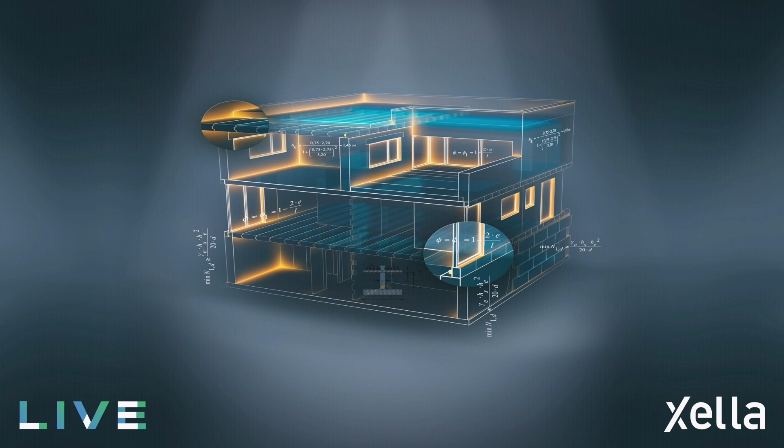We make structural design, a very precise way. We're using finite elements, so the digital twin is used here to make a clear structural design, to have all the information of the building, to give the building materials the right performance. The same we are doing from the energetic side. Thermal bridges are calculated in a way you can do it in a perfect way, so there is no waste of energy in the theory.

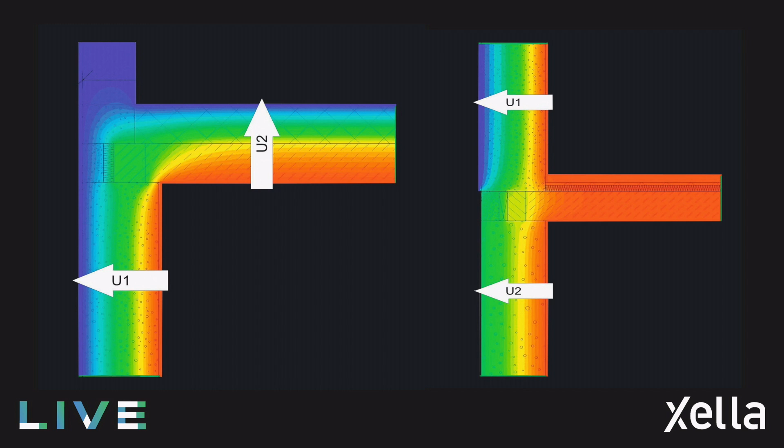So you see it here. The red is a warm side, the blue is a cold side, so we can bring everything in line. And that's a good thing. We have the computer, we have the information in the digital model. So we can take it out, bring it to different software solutions, and calculate the whole building.

Then the offline world starts, so the construction. You have very experienced craftsmen on the site. They know to use the materials. The increase of prefabrication, like Stefan told here, it's a normal way, because the lack of craftsmen, it's really a problem in the industry today. If you are looking for masonry workers, you will not find them in this number we need. So we start with prefabrication, larger elements, up to the size of a wall.

But we also invent the process of building. We start here in the Netherlands with the first site with the HoloLens. So you don't have drawings on the site, you use the HoloLens, and you see the wall you need to erect. So the funny thing, on the fair in Cologne just 2 weeks ago, we have had the HoloLens by Trimble here, the first HoloLens 2, and the German colleagues, they don't have it because we ordered it in Poland, so it was a little bit faster there. So digitalization is a global thing.

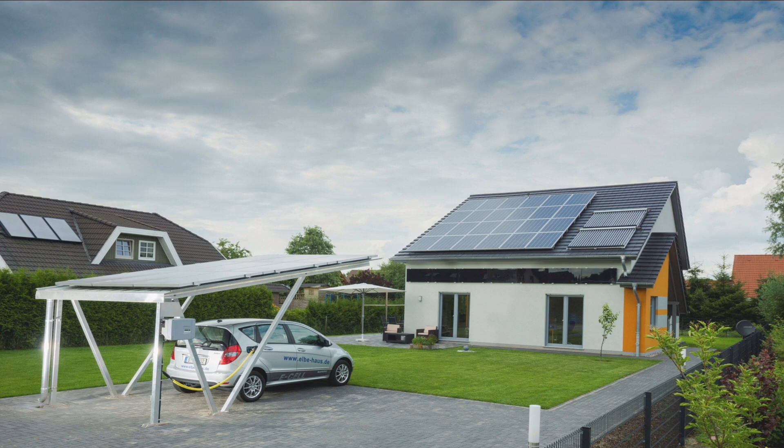And at the end, we have everything in there. We have built a nice house. We have a building pass, an energy pass, so we can hand it over. But don't do it in paper format. The file of a building is today the digital twin. There you have all the information in. And if you use this tool, it's very good. You have the material information in there, the maintenance information, so you can hand over a building to a customer with all information about maintenance.

So here also solar power. This is one of the first buildings in Germany, a zero-emission building with electric car, with solar power, with heat water. So if you see today a house or a building, a single family house, it's 70% of technology in it and only 30% of traditional engineering in it.

So you must do it in the right way there, and you must hand over to the owner a digital twin so that he understands what he can do with the building, how he can live in it, and there's the truth and the myth you can decide about. You can't open a window in a zero-emission building, but it looks very similar to a standard building. It's just technology you bring in it.

But nowadays, it's not only building a house. You must look much more closely at the resources you are using there. From the beginning, you saw we have only a few resources we are needing. But you must find them. And we don't have these resources unlimited. So it's a job of all building producers and manufacturers to take care to have a source of resources and use it in the best way.

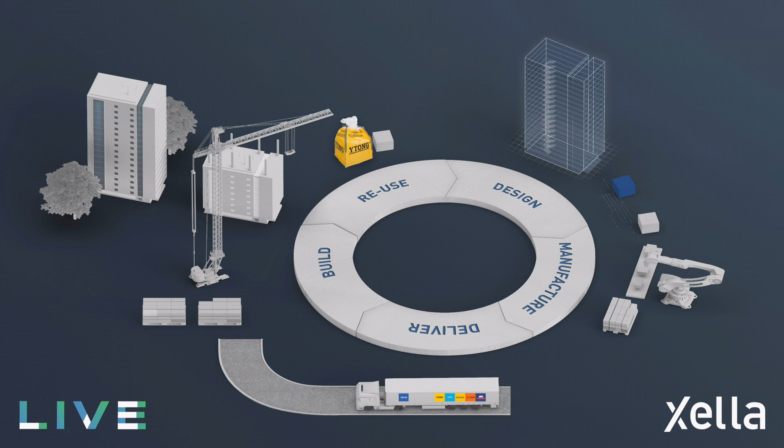So circular economy is one of the buzzwords here. You design the materials, and at the end of the life cycle, here at the top, you reuse the materials. If you don't do the urban mining, in the future we will have a lack of resources for new products. So we are thinking now how we can use the material in 40 to 50 years.

There's an obligation in the European Union to use recycling materials. In some countries, it's a must-have. In other countries, you can say, okay, you get better points in LEED or in all these certification systems. But you must do it. So you will do it like an X-ray now. You go much deeper in the building to understand the material content, to understand everything in there. But this is nothing new. You can have it in paper format.

I'm talking now a little bit about lifecycle analysis. The environmental product declaration gives you, in paper format, for almost 10, 12 years, the information on all your material content in view of environmental protection. You can get it from a manufacturer, you can get it from associations, but they are all similar. They have a clear structure, a clear content from production to the reuse phase. So it's the whole life cycle of a material.

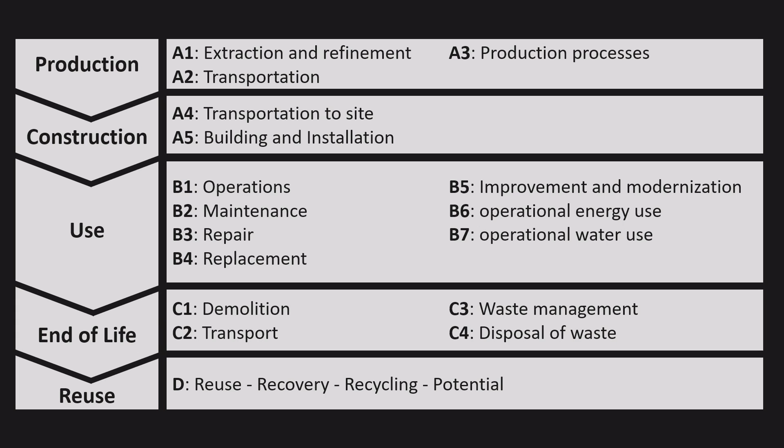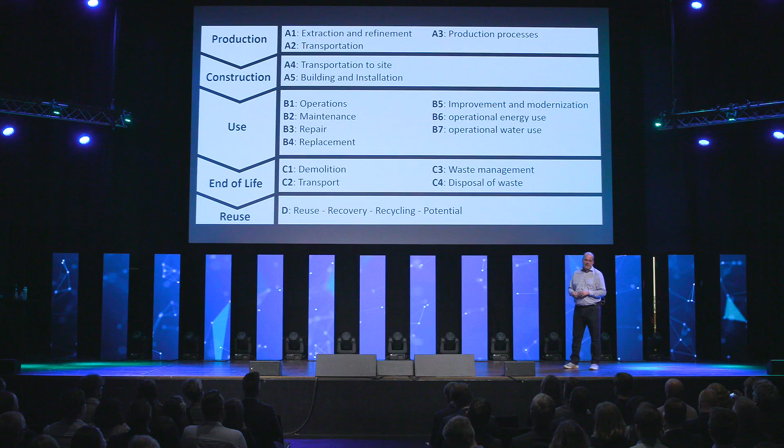And you must do it now for your materials. It will be one part of the Green Deal of the European Commission that you must have an environmental product declaration of your material. It doesn't matter what kind of material you are producing, but you will have to declare all the steps there from A to D in the different levels.

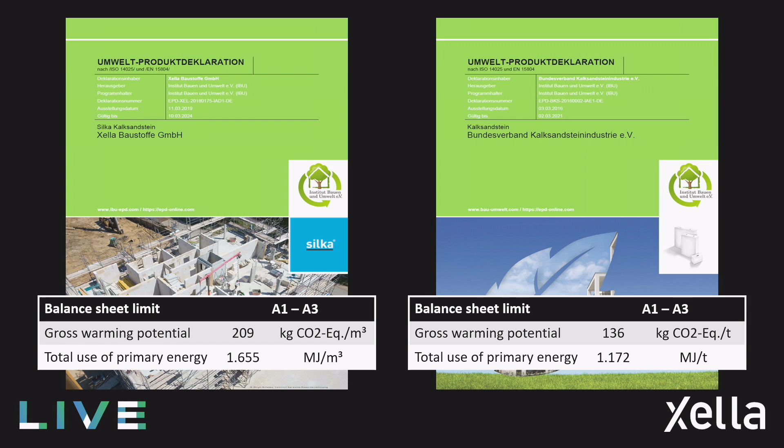But be aware, here you can see on the left side the Xella version for our calcium silicate products, and on the right side from the association in Germany for the same product. At first view you say, okay, well, not so good the product. But if you do it just this way and don't read it carefully, then you compare apples with pears. Because the problem is, and this is a big advantage of digitalization, that the units are different in the paper formats. On the left-hand side, it's based on cubic meter of material. On the right-hand side, it's on ton of material. So you're free how to declare.

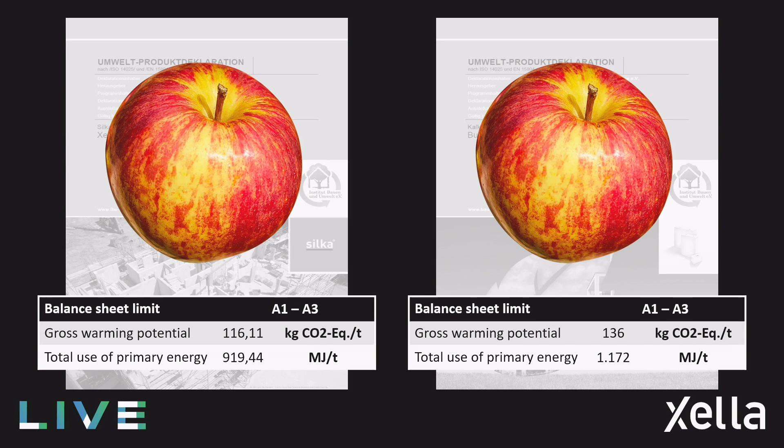But in the future, it will be at a similar level, and if you recalculate it, then you compare apples with apples, and you see it's the same value. It's a better value here for the material because we spend a lot of money and a lot of time monitoring our energy consumption. We are reusing material, so we have closed production loops in our factories. There is no waste in the AAC production, which originally comes from Sweden. 80 years ago, they invented it because of the wood crisis in Sweden. Nobody can imagine a crisis of wood, but okay, it's the way.

And now we have the chance to put all the information in the digital twin of our blocks. So we have the data in the companies. You have the data in your companies about your material properties. You need to add the environmental properties, and then you can bring it to your digital twins of the material.

A little bit of advertisement for BIMobject. They have offered it for half a year. You can find it there in the properties, where you can put in your environmental product data in the right units. So you have there all the same information I showed you on paper, now here in digital format.

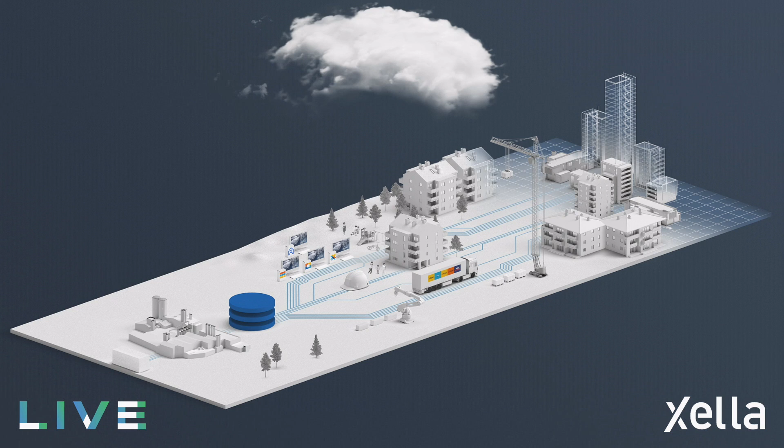And we decided to make the environmental impact of all our material visible. We have here our digital system on the left-hand side. It's the Xella group, and then we spread the data here from the blue data hub. And we will add, step by step, all information about all material properties for the performance of the materials on the one hand side and then environmental impact on the other hand side, so that designers can use it and bring it into their ideas.

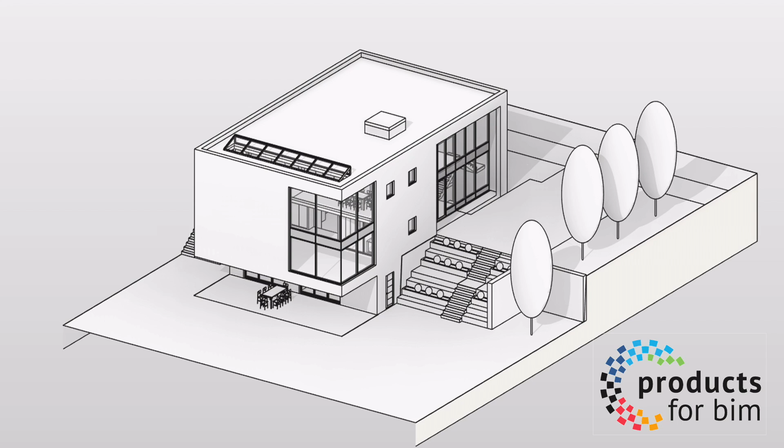This is an example. We have the German Association Products for BIM, where we designed a sample building. It's only half of the part. There's an industrial building on the other side. And this is a typical Ytong wall. We have only white building materials. So this is how it should look if you go into a new construction.

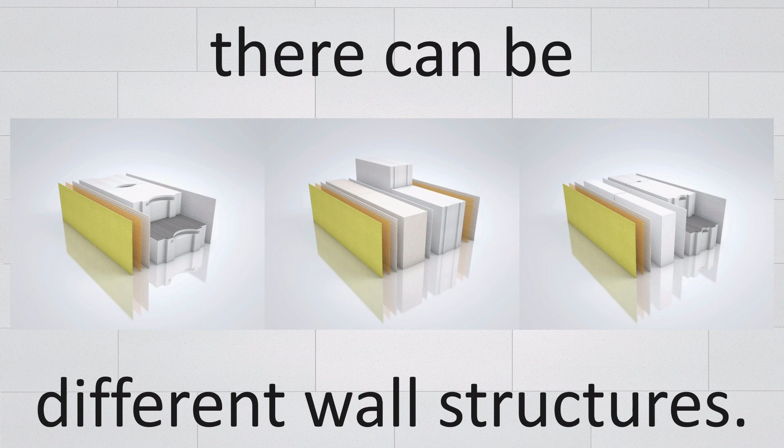But behind this wall, there can be many technically similar wall solutions. I selected only 3 different wall solutions. They have the same technical performance: thermal resistance, load capacity, and almost the same wall thickness. We are not talking about more than 2 or 3 centimeters difference in thickness. And if you bring this to the different models, you can do it very easily. That's a good thing about digitalization. You change the wall from one type to another type.

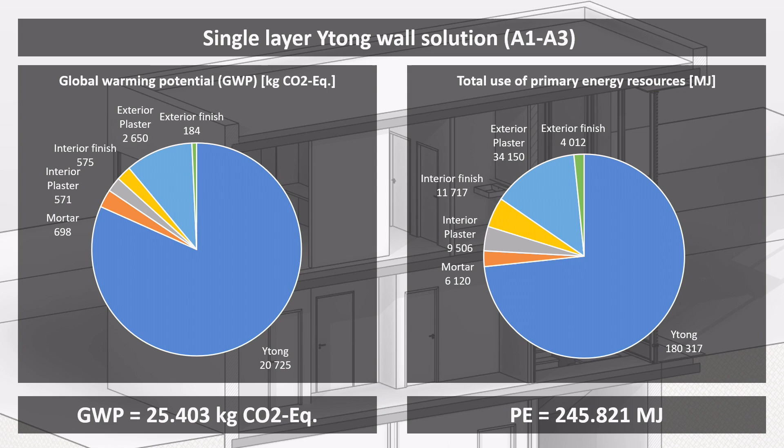So we start here with a monolithic Ytong wall, 80 years experience with it. It's one of the best solutions. And this is a lifecycle analysis for the production of this material. And you see there is a lot of energy in it. We can do the same with a calcium silicate wall with a mineral insulation system, our Multipor system. So we reduce a little bit the global warming potential and the primary energy use.

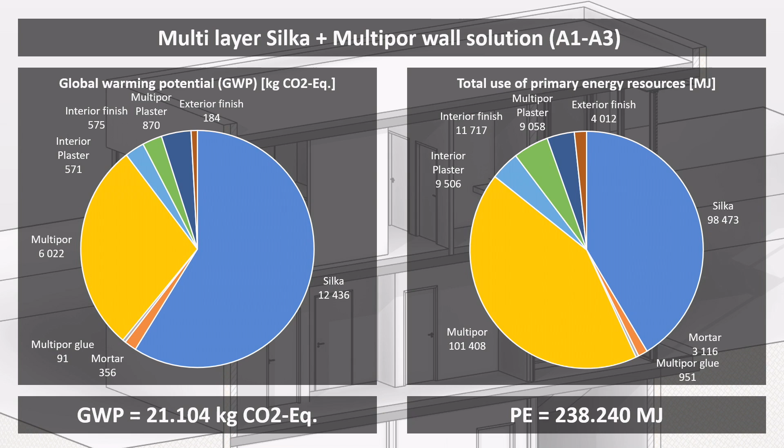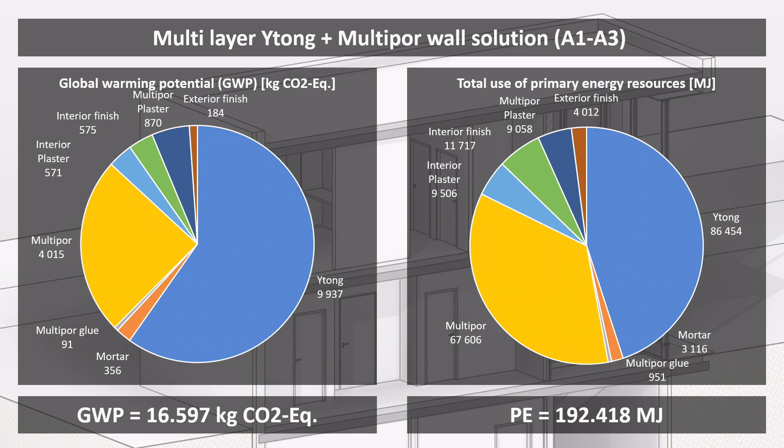The same, we can combine Ytong with Multipor. It's also working for this building. Now you have less than 200,000 megajoules of primary energy. And this is how we can do it: you make the design of a building step by step at the beginning, and you can see that by the design you can save about 35% of global warming potential. And this is the role of designers in the future, to make decisions based on energy properties and environmental properties.

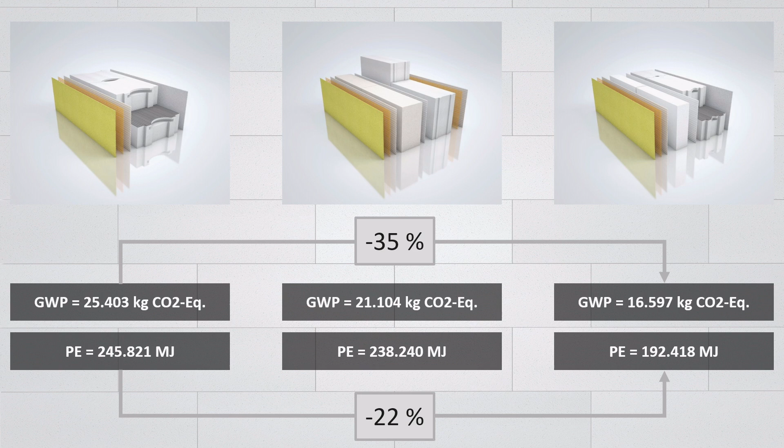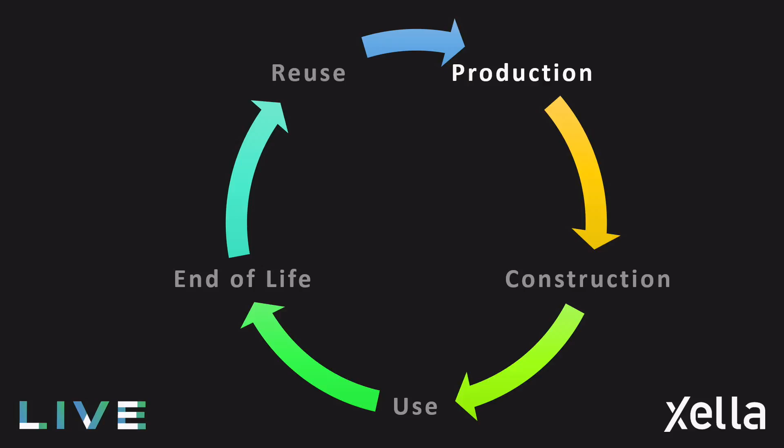But this is only one part. I show you here only the production side. Materials have a life cycle. If you compare the 3 versions, the monolithic wall has a duration of 80 years with less maintenance work. If you have an ETICS system, depending on the country, then you need to renew it. You have repair work on it. So the lifespan is only 40 or 50 years, depending on the system. So if you compare it over the whole life cycle, maybe the first design idea is not the best one.

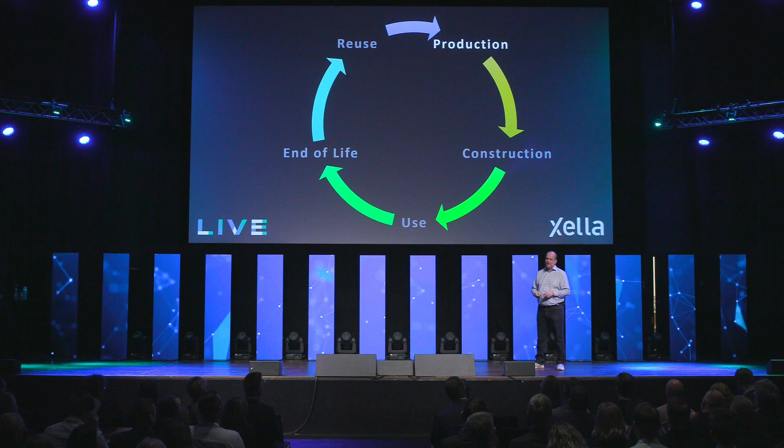But deciding about the life cycle and the duration, how long you can use a building material or anything else in the building, is a part we can talk about a long time, because nobody really knows. But if you don't do it right, it's the same story: you compare apples with pears. So talking about environmental design means talking about the same situation.

And for us, it's our job now to work together to bring all the data we have in our companies to the public, so that we can use it, make environmental assessments on the buildings, and create a sustainable environment and the future of the building. We can only do it with digital tools, because then you can calculate the alternatives, and this is something we need to do, because otherwise we will run out of resources, and we need to do it in the best way together.